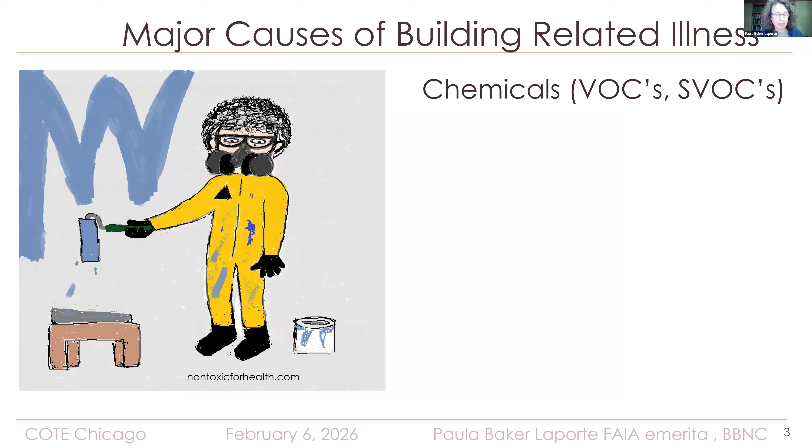Over the years, there's three major things that people called us for. People were affected in three major ways: by chemicals in their environment, VOCs, SVOCs, harder to trace, mold,

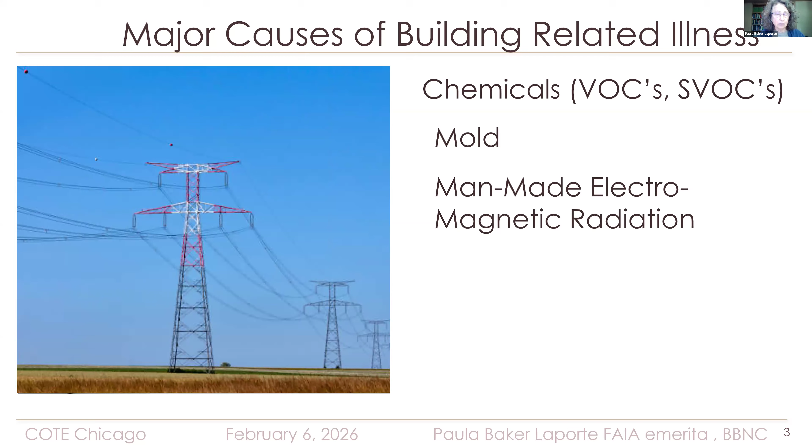and man-made electromagnetic radiation. So what I realize after all these years is that architects should also take the Hippocratic Oath when we become architects, to first do no harm. How do we do that?

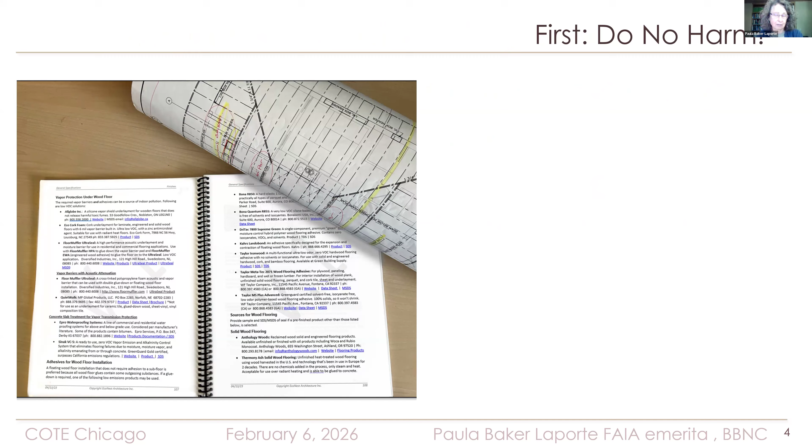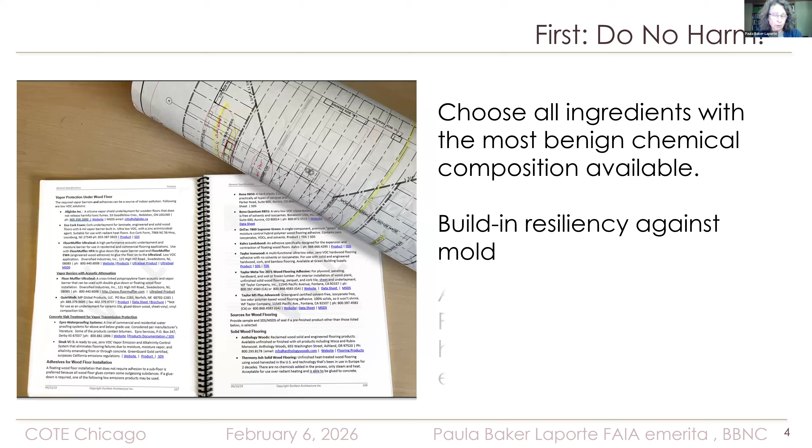Well, we choose all ingredients with the most benign chemical composition available, build in resiliency against mold, and avoid electromagnetic pollution generation in homes and shield from external sources. So I'm going to talk about each of these briefly.

Chemicals. We aren't trained as chemists, and yet to really do the research we need to pick the most benign ingredients, we need to know about chemistry.

What's interesting is that all of the functions and services delivered by living systems found in nature are a result of the use of these 12 chemicals in the periodic table. And these chemicals have a history of serving us for the last 3.5 billion years. That's quite a track record, until about maybe 150 years ago.

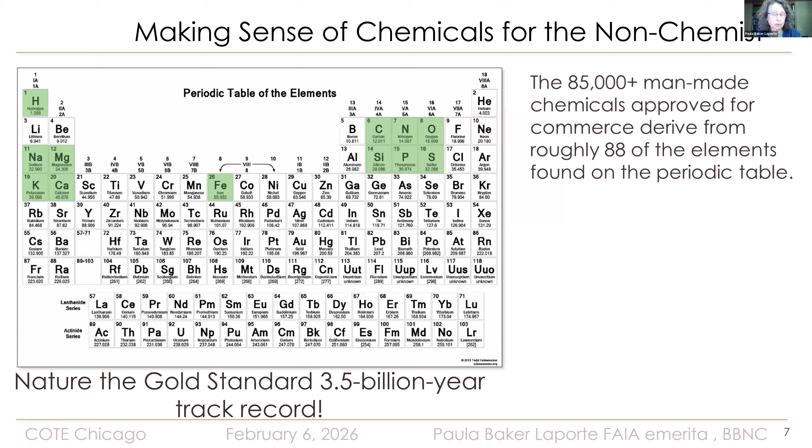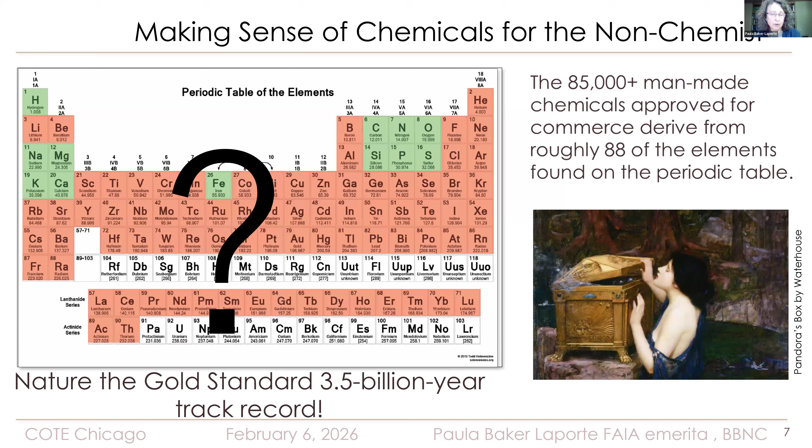Now we have about 85,000 man-made chemicals approved for commerce, derived from roughly 88 of the elements found in the periodic table. And we know very little about them, to be honest. In fact, we've created a veritable Pandora's box.

But don't worry. Well, first of all, you should know that in 1976, the EPA created the Toxic Substance Control Act, and 62,000 of the chemicals were automatically grandfathered into the national database with no testing. But they now have a mandate to test them as of 2016, if things don't change.

And they can test approximately 16 a year, which means that in another 3,875 years, we'll know what we've done.

So we know that you can take two man-made chemicals, combine them, and get something deadly. If you look in many people's cleaning closets, you'll find both Clorox and ammonia. When you mix those two together, you get nerve gas, and it's readily available. We know almost nothing about the thousands of chemicals we've combined into our environment.

So how do we decide what makes it healthy? When I started, nothing advertised being healthy because no one cared. Now everything advertises as being healthy. There's such a thing as greenwash, as you in the Committee on the Environment for Chicago must know.

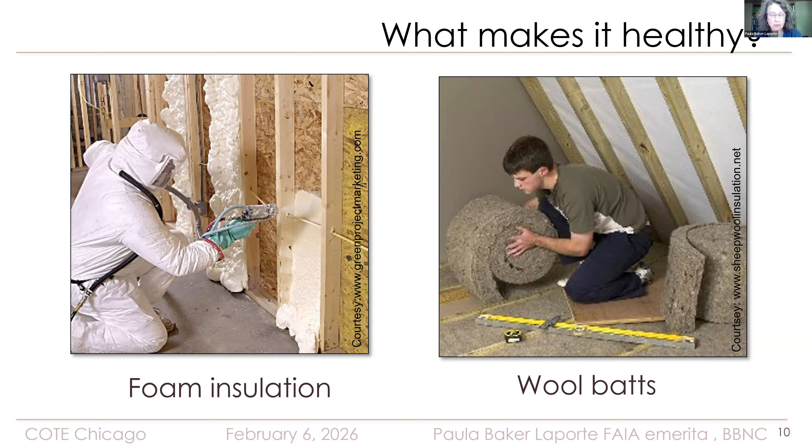So here are two products, both advertised as being good for you, for your health. And so we have to be the discriminators for our clients, who know even less than us.

We have help now. Harmful chemicals are now revealed, declared, disclosed, and scored by a number of organizations. But it's complicated—who's certifying what, for what? There's not consensus among the organizations of what they should be screening for, and it takes time.

Homeowners lack the skill set, and that's why we as architects need to learn them. Consumers are getting more informed, but if homes had better labels, if we taught our clients more, health-minded consumers would demand a better product than what they're getting.

So here's what your clients can do: they can find out what's in it before they buy it. Because we can make all the effort possible to create a clean building, and then when people move in, they can destroy it almost instantly by bringing in products and practices that'll destroy their health.

By simply taking their shoes off, they can help the health of the house incredibly. The highest rates of pesticides in the country are found in carpets in Florida because everyone walks on the pesticides and then walks all over the carpet. And that's where the babies play. And we can build in things that help them detox from a toxic world out there, such as saunas.

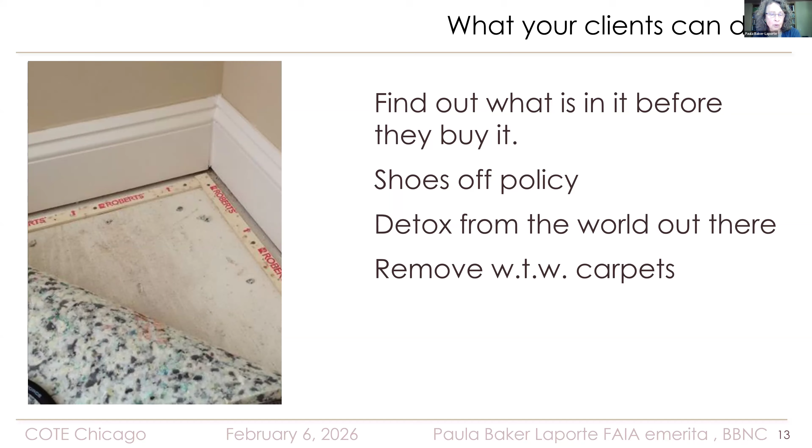And good routine cleaning can go a long way. We can prevent VOCs and SVOCs, forever chemicals that stay in the environment and only get cleaned out. They're harmful to us because they're in the dust, and good cleaning practice is a way to get rid of them, besides reducing them in the construction.

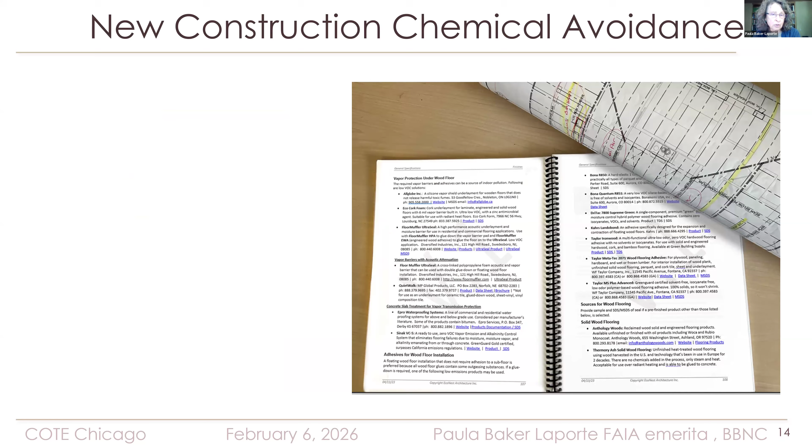We can design for combustion safety, separating cars and combustion sources from future occupants. We can design in climatic resilience to minimize the dependency on mechanical systems and provide mechanical air filtration.

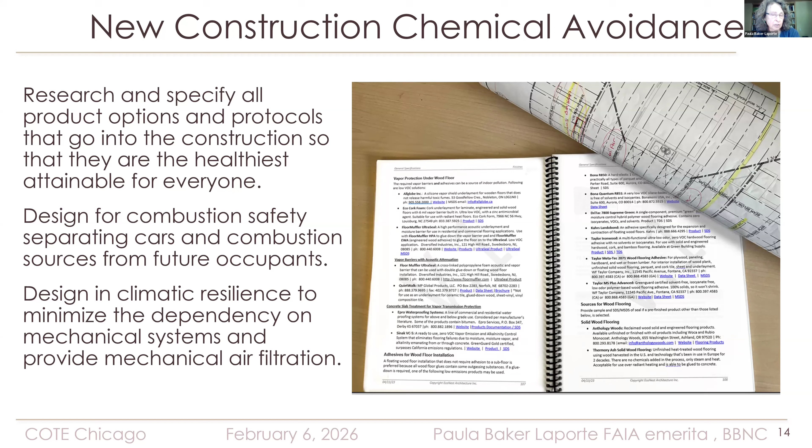So I'm just going to talk about mold for a moment. So why are our homes so mold prone? First of all, 95% of them are stick frame construction. It's very rare to have a stick frame that is not moldy on move-in date because they get rained on. They're hard to shelter and expensive.

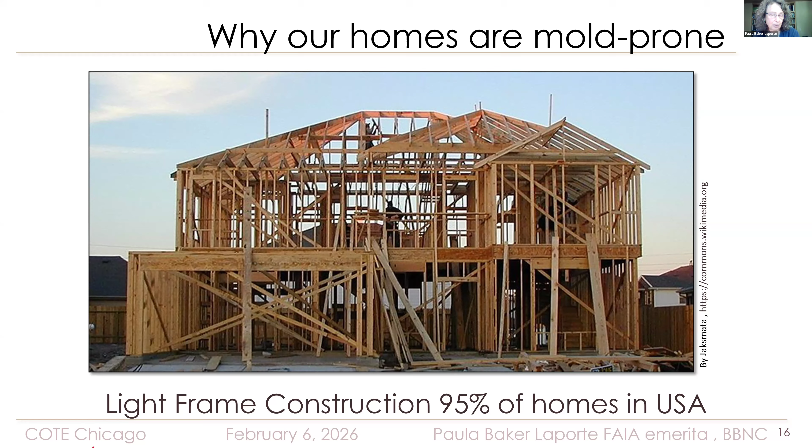Building codes mandate vapor barriers. We have smarter options now, but the majority of buildings are built with plastic on the inside, and the majority of climates have 4 seasons. So that plastic prevents walls from drying out once they do get wet.

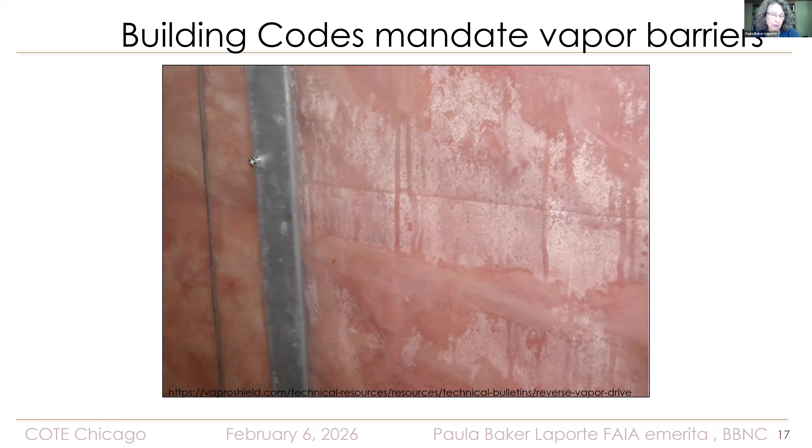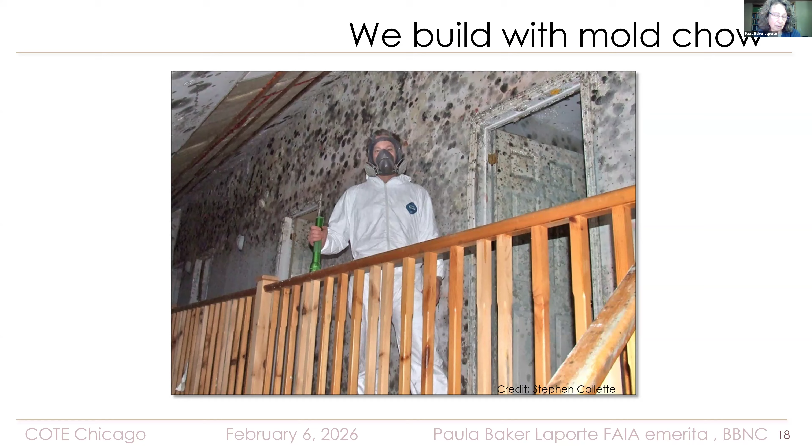We build with mold chow. This was my teaching buddy for 18 years, Steve Collette, who did home inspections. And everything you're looking at there was the result of a water heater breaking while the owners were absent. Within a couple of weeks, the entire building looked like this. It was actually an insurance teardown.

We use standard plastic finishes in our buildings that trap moisture. And when you trap moisture behind plastic, mold happens.

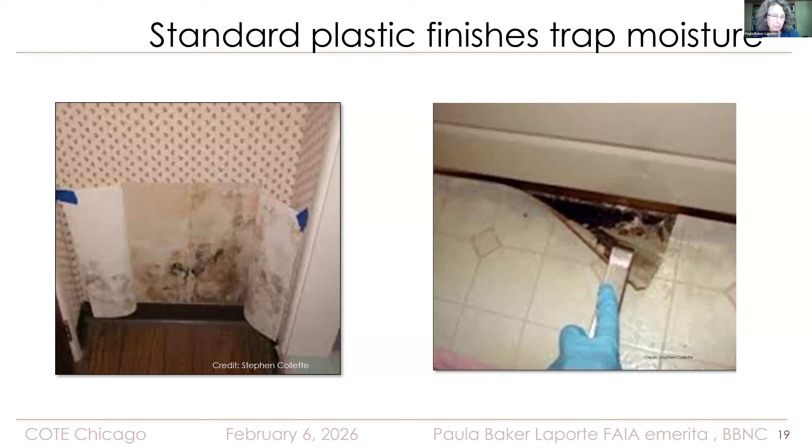A huge percentage of our homes are centrally heated with a furnace and ductwork to distribute it. And once the home becomes moldy in one area, the ductwork does a great job of distributing it throughout the house. Ductwork, if it's not maintained, becomes a trap for dust, which, add moisture, and you've got moldy ductwork. Huge problem.

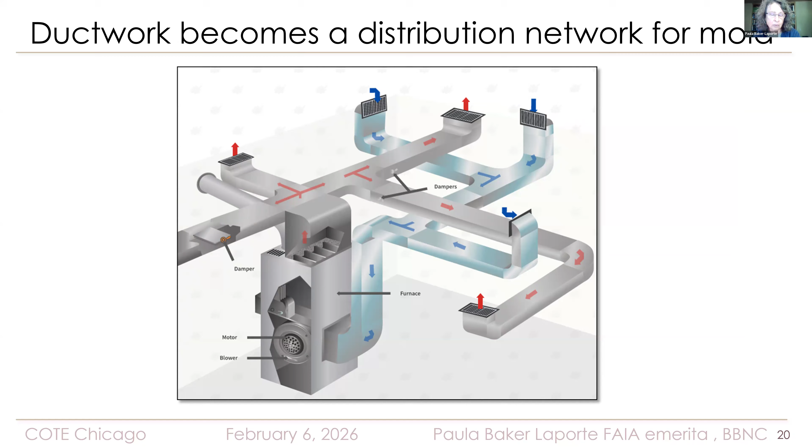Homeowners can do several things to prevent, once we equip them with a good home, water loss events, which is half of why people come to us because they're sick from mold. They had a flood of some type. The water heater broke and they have a crawl space and no one was monitoring the crawl space. And when someone finally went down there, it was covered in mold. We hear these stories. I've heard them hundreds of times now.

Well, one thing a homeowner can do is get water loss detectors and shut-off devices, and we specify them for all of our buildings.

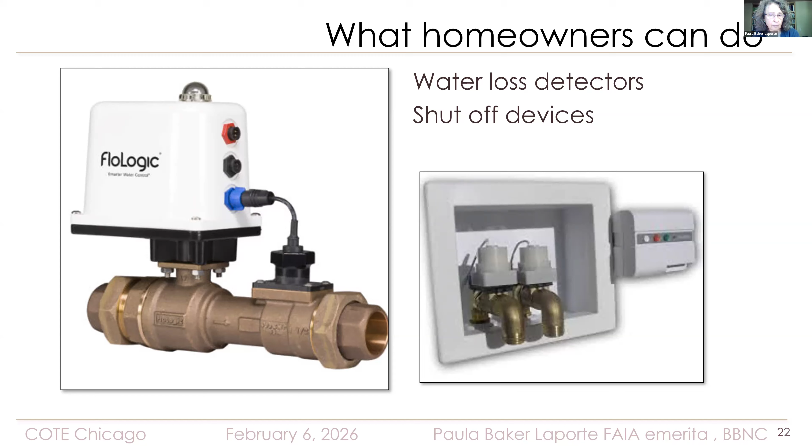Sink liners, for homeowners who don't go around and inspect under their sinks. It's not if the plumbing is going to leak, it's when. And when it does, and if you're not looking, is it going to cause mold, or do you have some protection?

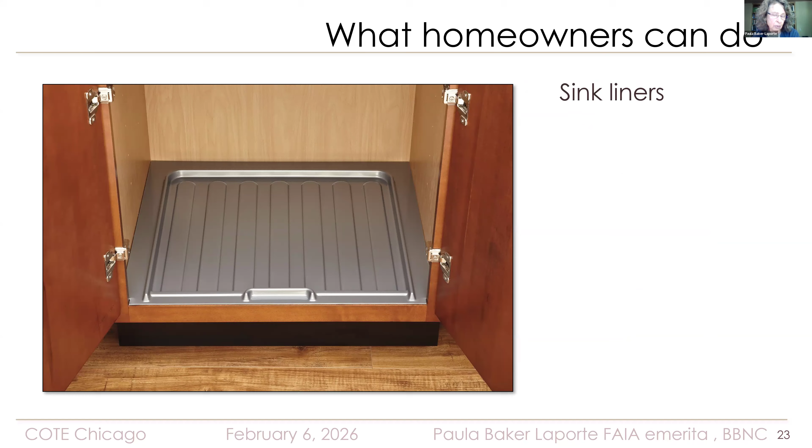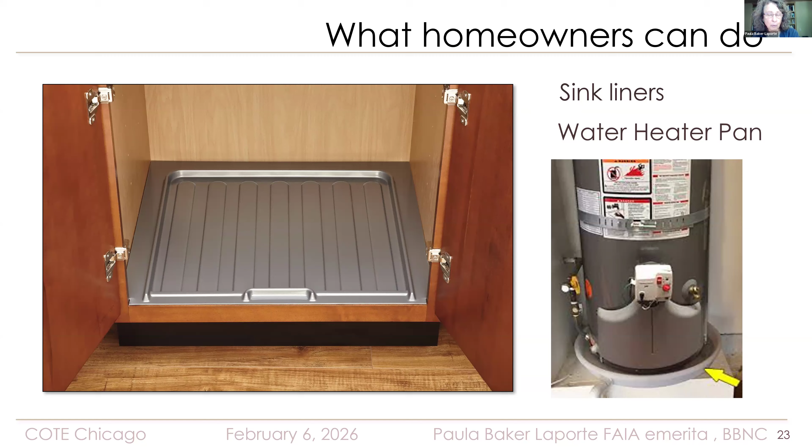Water heater pan. So you can fit a water heater with a pan so that when, not if, but when it does break, it doesn't cause mold.

They also have better appliances now. So you can buy dishwashers, for example, that have built-in flood protection and will shut themselves off as soon as any water is detected in the wrong place.

If a homeowner suspects they're sick from mold, professional testing is the way to go. There are many nuances about how to test for mold and what to look for. If you, as an architect, are educated in the generalities of that, you can save these homeowners thousands and thousands of dollars that can be put towards correcting the problem.

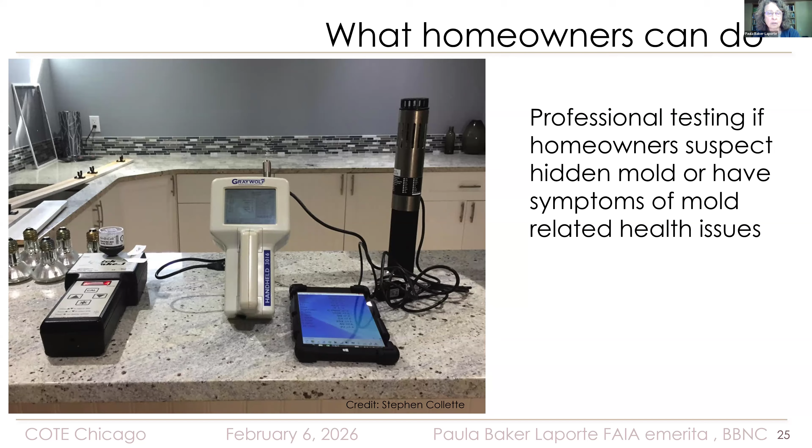So here are some of the things we have done for new construction mold prevention that are in our specifications. We introduced building protocols that protect the building and its components against moisture during construction. Again, difficult to do with stick frame construction, but you can specify that it be dried out and remediated before any insulation or finishes are put in.

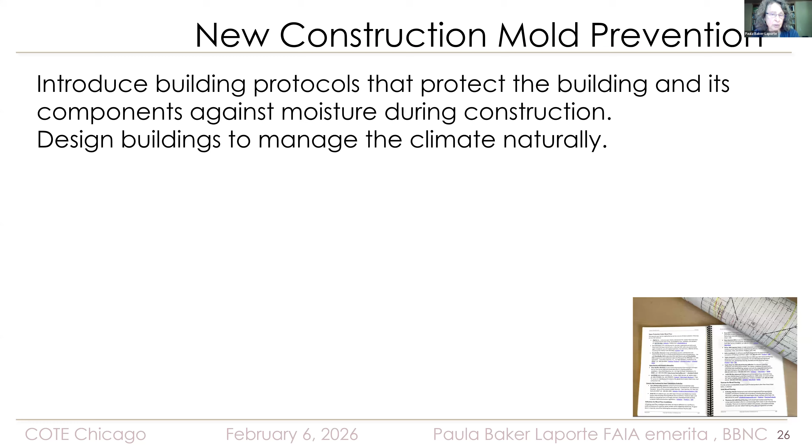Design buildings to manage the climate naturally—we'll talk more about that later. Create a watertight envelope and direct water away from it. Build in resiliency to prevent condensation. Create hygric buffering, airtightness, insulation, etc.—all of the good things that building science has taught us over the years.

Dry out new wet buildings from wet construction processes. This is often overlooked and most often not specified for residential homes, and is the cause of several mold events. Avoid building products that are a ready source of mold food.

We have not built a stick frame home or designed a stick frame home in my own practice for the last 30 years I was in it, but we do consulting on a lot of stick frame buildings. We will specify, for example, paperless drywall, especially in areas like bathrooms that are prone to mold. Build in safeguards within the building to minimize damage from inevitable eventual water loss events like the ones I showed in the previous slides.

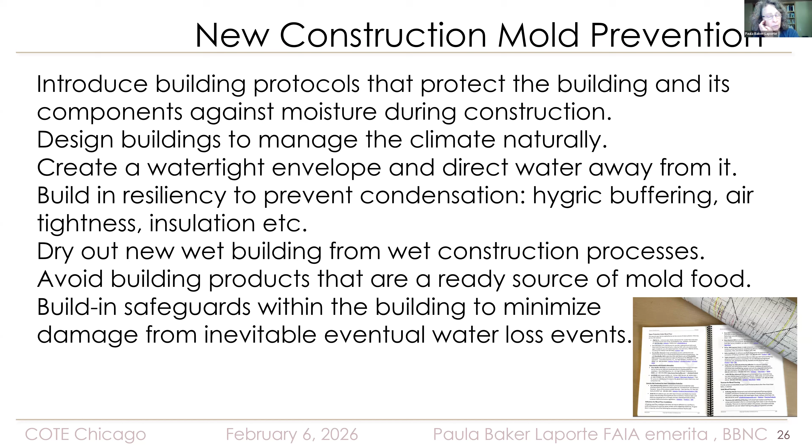So, electromagnetic radiation. You won't find any information on electromagnetic radiation or its harmful health effects in any of the green building scorecards that we've created within the industry. It is perhaps the fastest growing unregulated health threat. We get the phone calls.

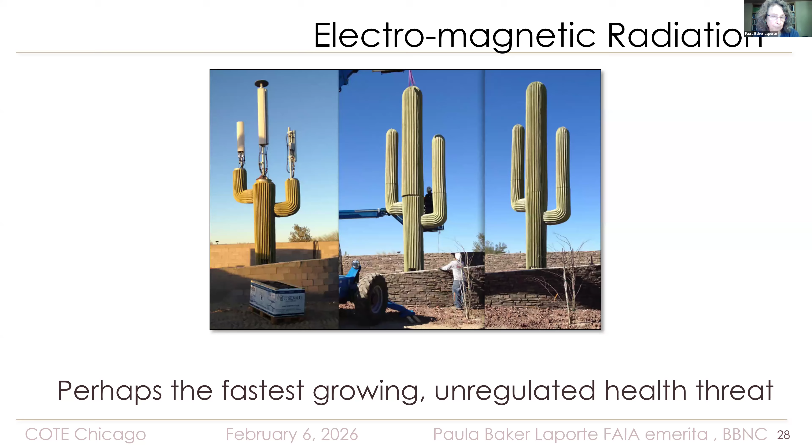In my office, we would get 10 new calls a week from people who were suffering. At first, it was just chemicals. As that has gotten better, mold and electromagnetic radiation have taken the forefront. And it is an elephant in the room.

Is there really an issue? Because I'm a building biologist, I attend all the conferences. It's not my thing—I know who to call, and I know the basics, and our specifications in my book have the basics, so architects know what to specify to safeguard their clients' health. It doesn't go into what people need to do if they get someone who's really suffering and is already sensitized—that's much more complex.

But is it really an issue? You would think it isn't. I don't know how many of you have heard of it—it would be interesting to know after the lecture. It could be seen, though.

Martin Pall gave us a lecture at one of our conferences. He's a professor emeritus of biochemistry and Basic Medical Sciences for Washington State University and spent a good deal of his life running tests and experiments on this problem. His conclusion: it can be seen that low-level EMF exposure attacks each of the four things we often value most as individuals and as a species—our health, our brain function, the integrity of our genomes, and our ability to produce healthy offspring.

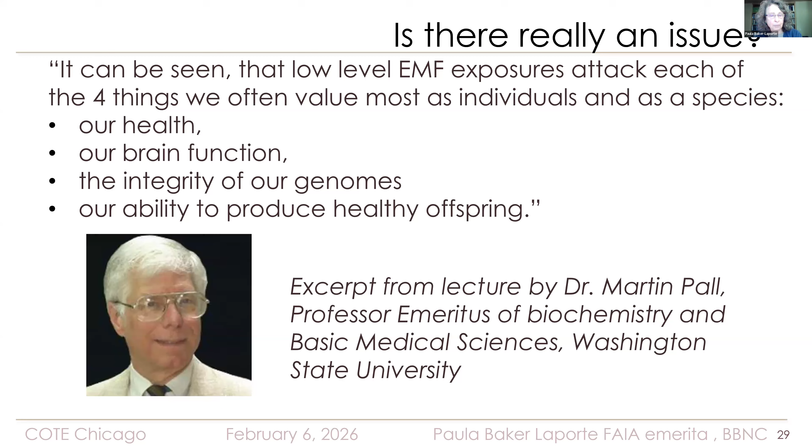Pretty sobering. So what can homeowners do? They can commit to a hardwired lifestyle at home, providing Ethernet outlets and Ethernet connections. It's a lot more stable, and then we have a way to feed our technology without being Wi-Fi dependent.

If someone can do nothing else, they can at least sleep in an electromagnetic radiation-free zone. Our hours at night when we're sleeping are when we do our cellular repair. So this is simple: we can turn off the electricity to the bedroom and measure it to make sure it's safe, and have an electromagnetic radiation survey done on the home.

Homes have different kinds of problems. The Building Biology Institute has done a very, very good job at training electromagnetic radiation specialists since its introduction into this country in the late 80s, when absolutely no one was talking about this and we didn't even have internet yet.

So if you are an architect specifying new construction, the first thing you can do is have a specialist survey the site prior to construction to determine shielding requirements. This is simple instrumentation and something any architect can learn to do as well. Specify building-integrated shielding if it's needed.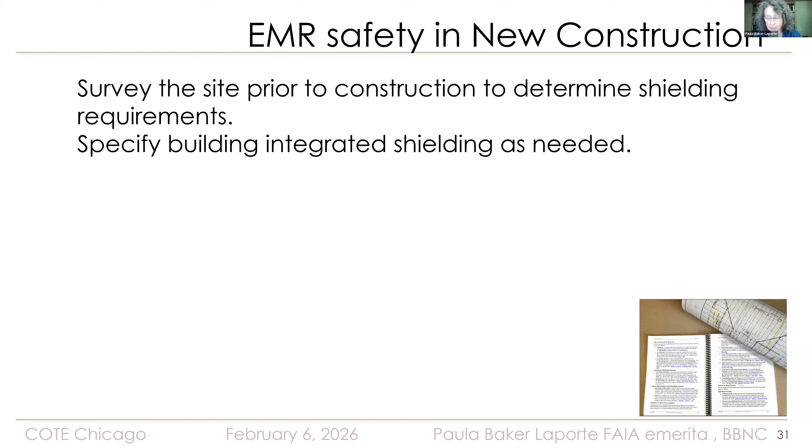We can minimize electropollution from the utilities and the panel. We can specify household wiring to eliminate electromagnetic exposure to the occupant. We can specify the lowest EMR appliances and lighting, which is becoming more and more of a problem as appliances introduce smart technologies—so it'll know when you're out of bread or whatever it's doing.

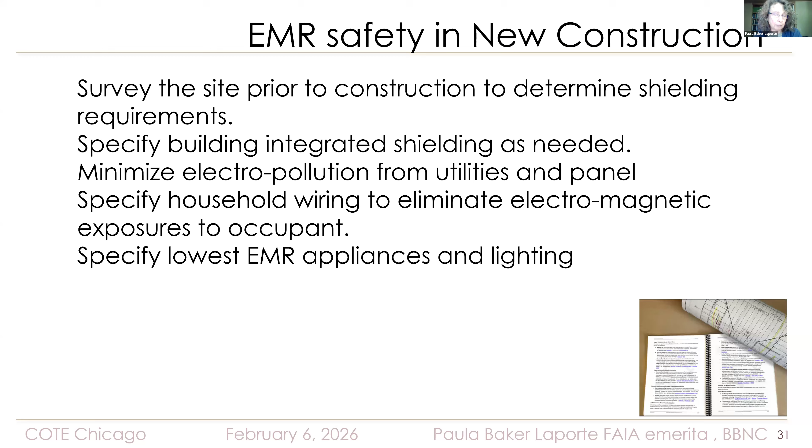And as we ban the incandescent light bulb, the only thing that was guaranteed not to emit certain frequencies, it's a whole new case-by-case rediscovery.

Verify results with an EMRS with calibrated metering devices. So you can specify it all, but if a client really needs it, you need to get the home inspected after it's constructed and at various stages during construction before things are covered up.

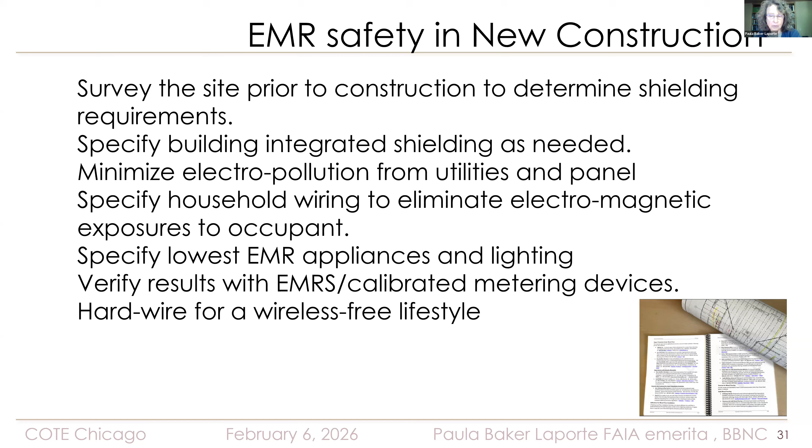And hardwire for a wireless-free lifestyle. At the very least, we can have bedrooms that turn off and put Ethernet in our buildings. So that's how to not cause harm.

Now we get into building biology. What if we could build homes that went beyond not harming us? What if our homes could be a regenerative force where we, the occupants, and the larger community—

—are deeply nurtured at every stage of its building's life, from the acquisition of building materials through construction and habitation and beyond its service lifetime. So what if through the whole life cycle of everything we care about, we could do better? We could build buildings that nurtured.

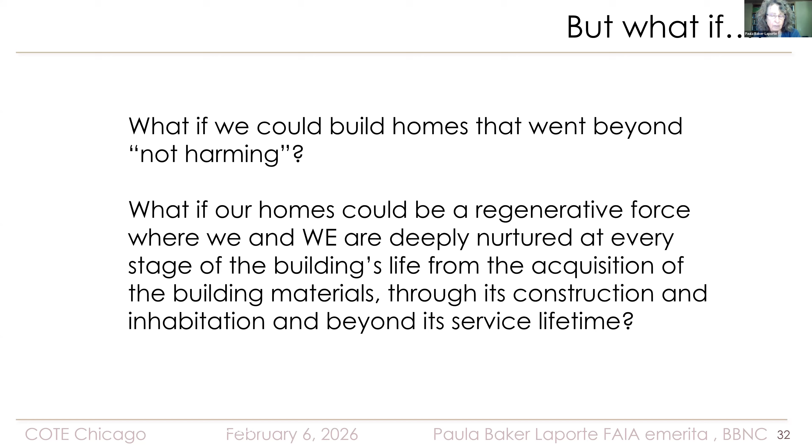I love this think tank. They're in Santa Fe, New Mexico, and I quote this quote from Regenesis in every talk I've ever given.

Green or eco-efficient design is insufficient because it misses the real potential that arises out of the human presence on the planet—the possibility of organizing human activities so that they continually feed and are fed by the living systems within which they occur. It's not enough to aspire to mitigate the effects of human activity. People need to take their place again as part of nature.

This is completely in alignment with the ethos of building biology. So from not harmful to health enhancing, building biology sees nature as the gold standard for human health and model for ecological balance.

The physics of how homes work, how buildings work, is very complex. But according to Anton Schneider, one of the founders of building biology in Germany, the solution is simple: a home will serve your health to the degree that natural, unprocessed materials are used to create it.

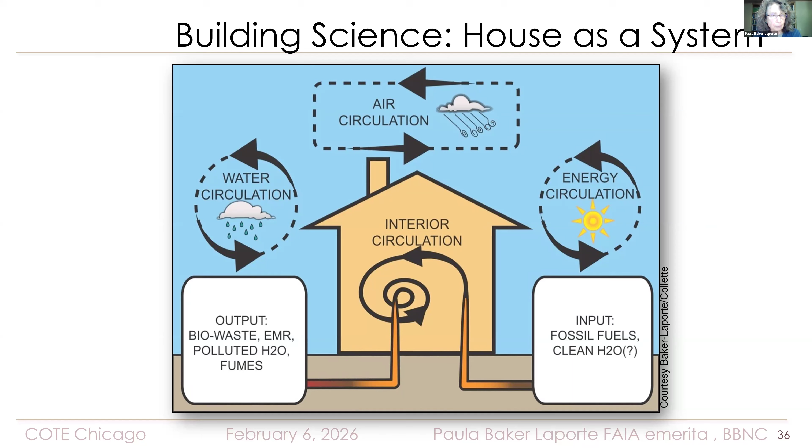If you take that same diagram, green building I would say is trying to achieve house as a better system, still based on house as a system for the most part. The idea is to reduce the input of fossil fuels and water and the pollution from our output to some magical point where we will then be living sustainably, and our buildings will not be causing harm at a rate greater than the natural environment can handle.

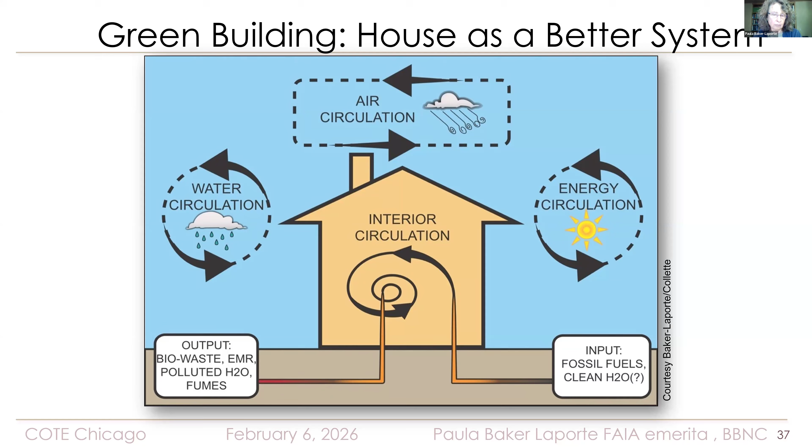Building biology has a different paradigm. It sees the house as an organism and asks: how can we mitigate or ameliorate the vicissitudes of nature and still bring those health qualities into it, and be good citizens in what we output as well.

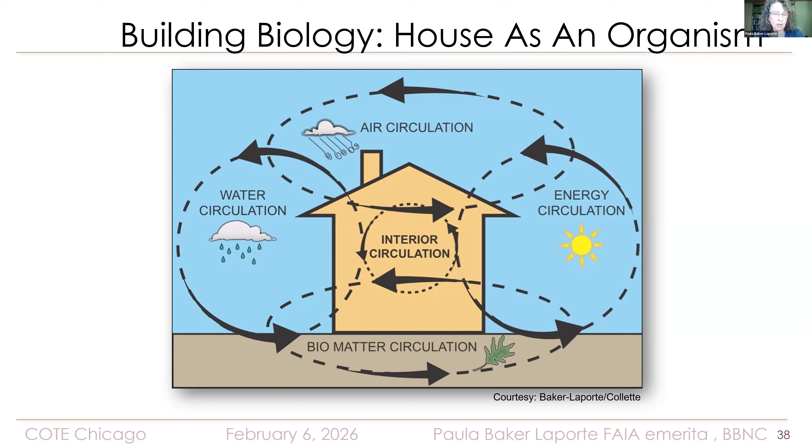So be a part of that system. How can our homes help us to be part of the natural system? In the European context, this is not as big a news in Europe as it is to us North Americans, because they're surrounded by buildings.

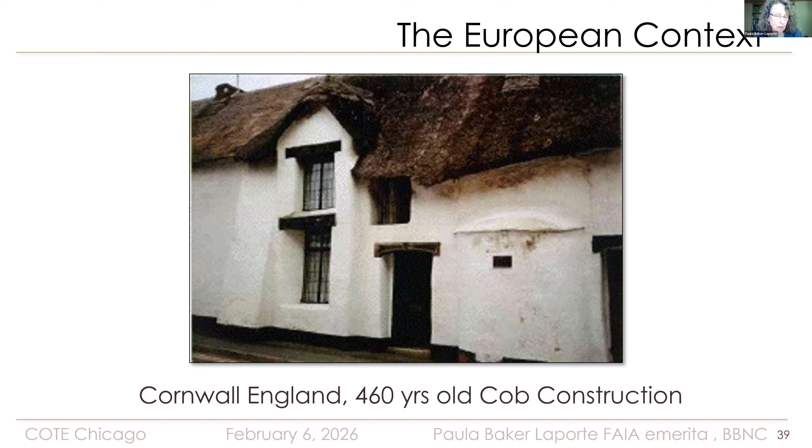Cornwall, England, this cob building, 460 years old. Rhone Valley, France, rammed earth, 250 years old. Limburg an der Lahn, 650-year-old wattle and daub timber frames that are loved.

Maintained, and still in action. Compare that to our homes, which are in need of serious renovation by the time their 30-year mortgage is running out. It's a different mindset about how to build.

So what do all those buildings have in common? Clay. Clay has an unparalleled hygric buffering capacity.

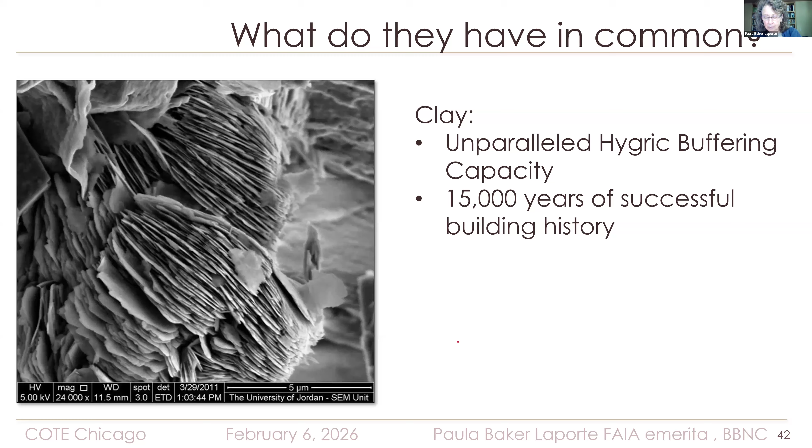I remember being at a conference a long time ago. I was a speaker about natural building, and Joe Lstiburek was the spokesperson, rightfully so, of building science, and he talked about hygric buffering capacity for the first time. Through his talk I now understood what the Germans were talking about in their literature - an unparalleled amount of hygric buffering capacity, so much that these old buildings had flow-through wall systems. They didn't require any kind of barrier because they could handle everything in terms of water that the atmosphere was throwing at it. Clay has a 15,000-year history of successful building use and craftsmanship.

So building biology, along lines with seeing our home as nature's the gold standard, sees our home as our third skin, a dynamic interface. Our second skin is our clothing.

Our first skin is our skin. It's the largest organ in our body. Our skin shape shifts as the external environment changes, insulating us from cold and cooling us from heat.

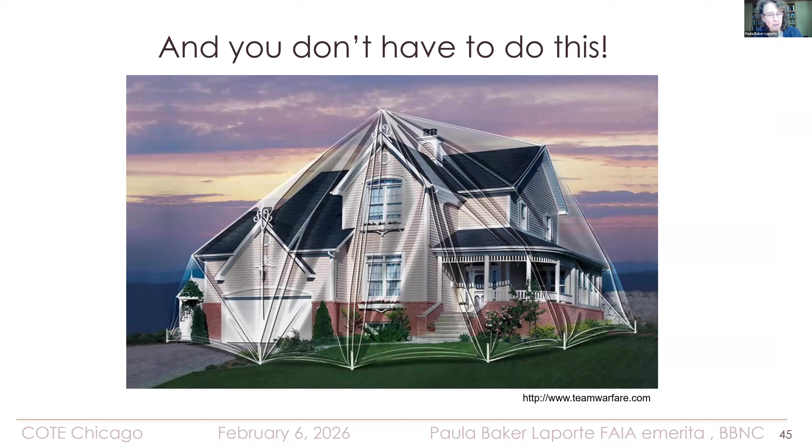So there are 25 principles of building biology. And if we distill them down to the type of building we would want to create, we want natural mass wall construction that's vapor open, high hygric buffering capacity, energy efficient, low embodied energy.

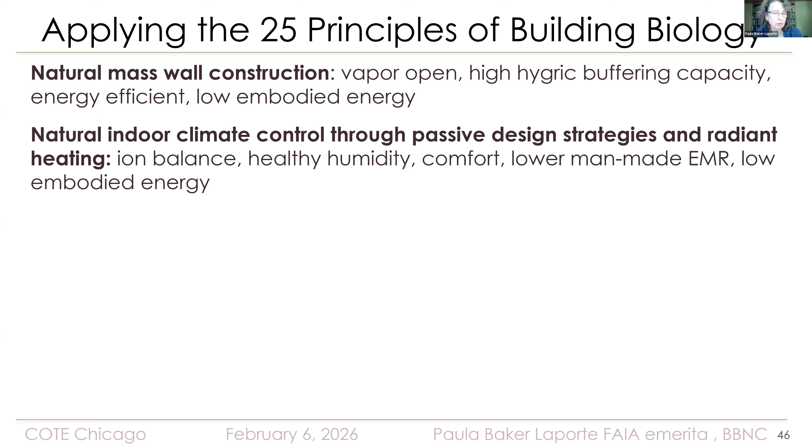We want natural indoor climate control through passive design strategies and radiant heating. We want this because when you combine radiant heating and thermal mass as the main heat source, you create ion balance, healthy humidity levels, comfort, lower man-made electromagnetic radiation, and low embodied energy.

We want natural daylighting and air exchange. We want the daylighting to be diffuse, multi-directional, operable, shadable, and site-specific. We're not against technology, but what about when the power goes down?

Natural, non-toxic materials, finishes, and furnishings. They should have a pleasant smell, be hygroscopic in and of themselves. They should create a balanced, subtle electroclimate - that is the DC climate, direct current - be sorptive, have sorptive acoustics, and color and pattern per nature.

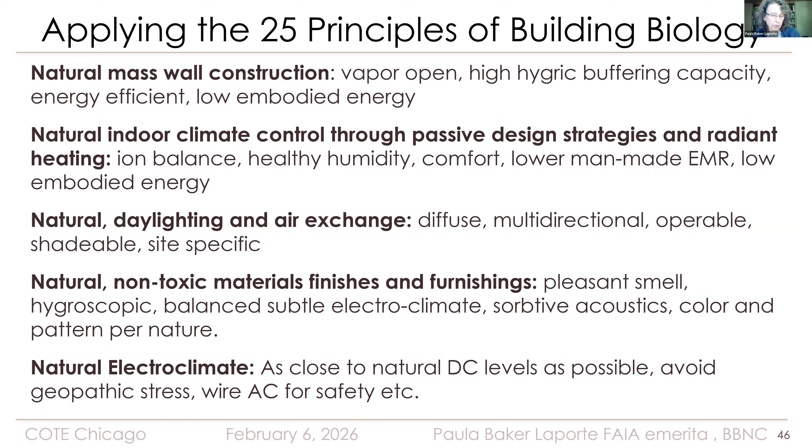And we should have a natural electroclimate that's as close to the natural direct current levels as possible, avoiding geopathic stress, and wired for AC safety, as I've mentioned.

So mass wall construction - what's available now here in North America that has mass and insulation, is non-toxic, has exceptional hygric buffering capacity, vapor open, EMR blocking capability.

Zafira, I realize I don't have any clock to look at while I'm doing this. If you can tell me when I've got like 5 minutes left, I will talk fast.

Okay, these are all methods I've either had the opportunity of working with, or there's a couple that I've drawn but didn't materialize. But they're all available depending on where you are in the country.

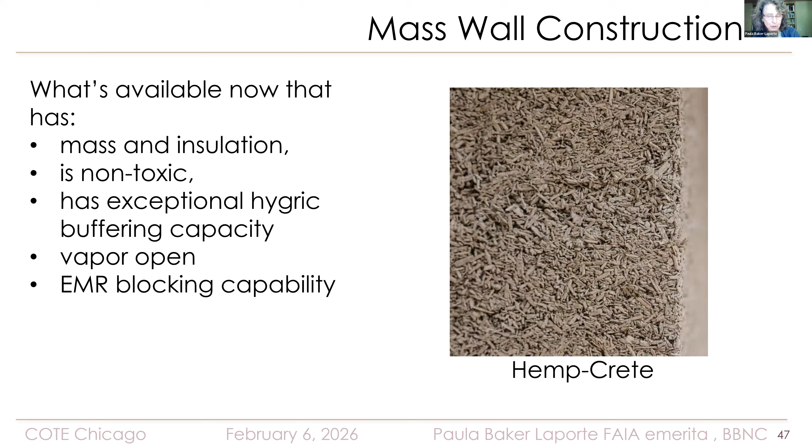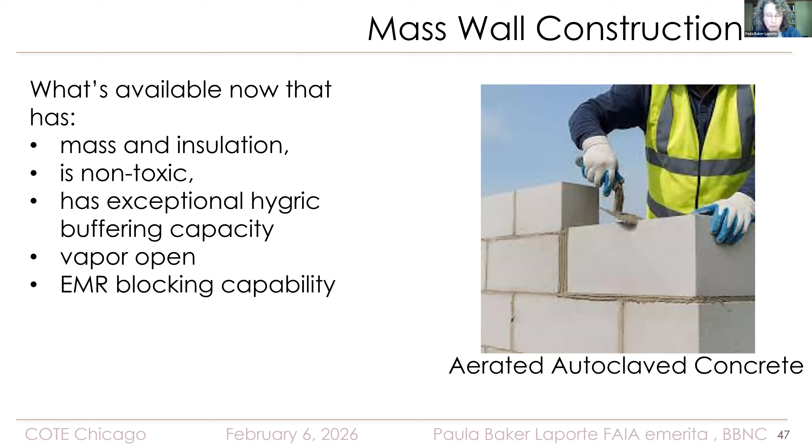Adobe, compressed earth block, available even in Chicago. Rammed earth, light straw clay, which is what I spent a great deal of my career working on. Hempcrete, which I think is a marvelous kind of newer version. Wood insulated concrete forms available and usable, made in Ontario, Canada, made in Oregon. And AAC, aerated autoclaved concrete, very popular in Europe, Japan, India, everywhere else I've traveled, and available in a few places here.

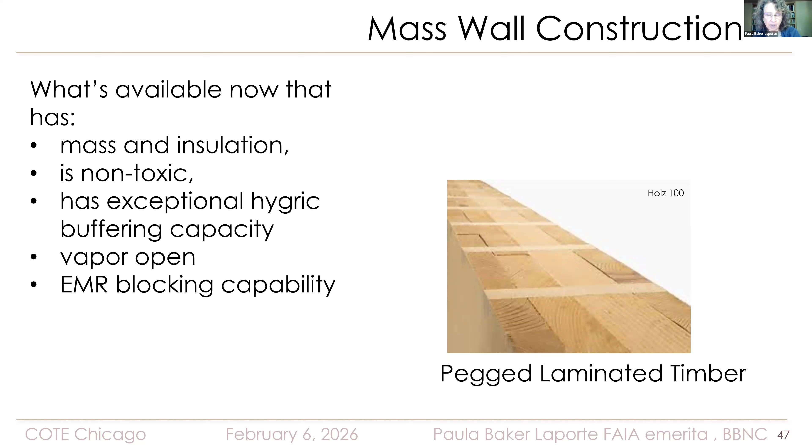All of these have the qualities. And then pegged laminated timber, wonderful material, again available through Holz 100 in Ontario, Canada. And it has all of these qualities.

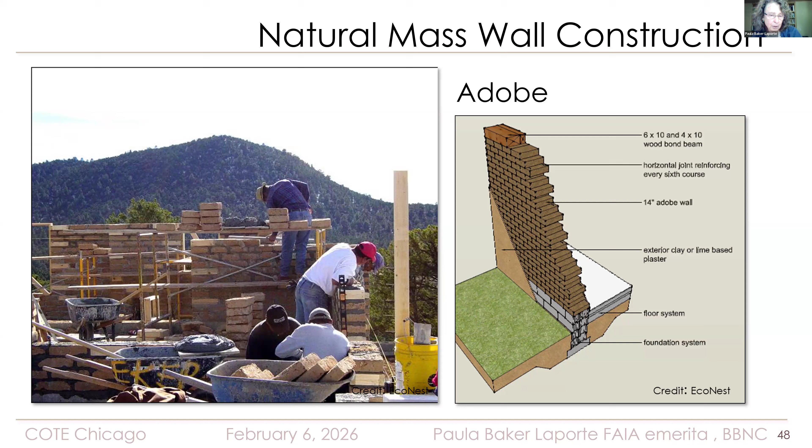So just some of the work my firm has done - natural mass wall adobe in Santa Fe, where I cut my teeth as an architect. These were not considered mud huts by any means. If a home was real adobe, people understood the quality and the feel of it, and it demanded more on the real estate market. So brick by 40-pound brick, the homes went up.

And here's some of the finished homes that we were responsible for designing. So you can see these aren't mud huts. These are high-end homes with a high degree of craftsmanship. Light straw clay.

In the time my husband and I worked together, Lou worked with Robert before I lassoed him and came to Santa Fe, but we have worked in 17 states, 5 provinces, and done over 60 homes. It's probably over 100 homes built with the light straw clay method. I worked with a team of people, including Lou, to get it into the International Residential Code. Robert and I had the privilege of writing 2 books about the work we've done with light straw clay. This was the first home we built for ourselves in Santa Fe in 1999, and this is the home we currently live in Ashland. We didn't change a whole lot in the formula, just small refinements over the years. We've built for ourselves about 5 times. We've lived in this home for 14 years now, the longest either of us have lived in a single place.

So, natural indoor climate control. How does nature do climate? Think of the sun and the earth. It's radiant heat, stored in thermal mass. If we were to spray the surface of the earth with foam insulation, humanity would not survive.

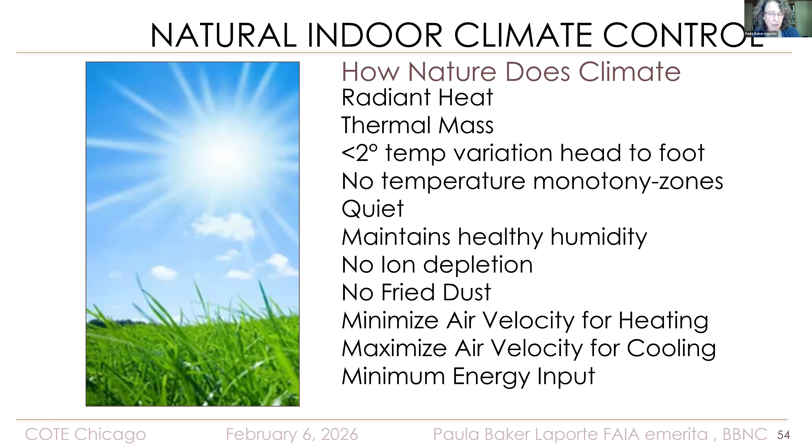So you'd have a 2-degree temperature variation from head to foot, like nature. There's no temperature monotony zones. We're talking about nature at its best, not nature in the Sahara Desert or places we probably wouldn't want to live. It's quiet, maintains healthy humidity—in other words, it doesn't blow air around to dry it in good climates. There's no ion depletion in good places in nature, no fried dust, and minimal air velocity when used for heating. We maximize air velocity for cooling, with minimum energy input—no fossil fuels burned to make the planet able to sustain us.

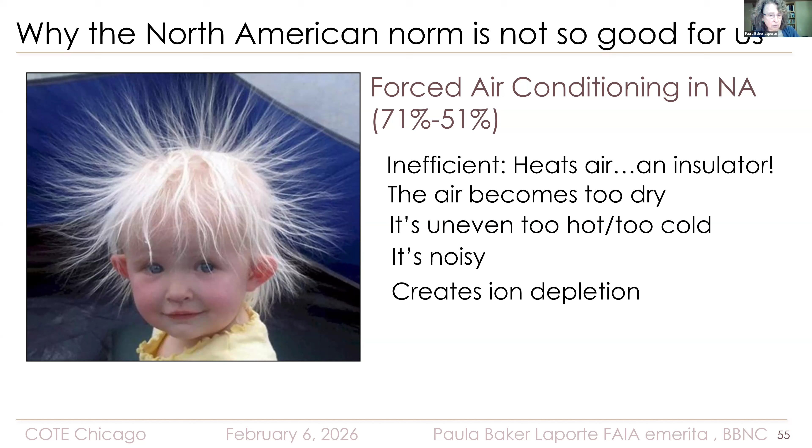Forced air conditioning in North America, through traditional furnaces—though mini splits and air-to-air systems are becoming popular—still contributes to 71 to 51% of our homes in North America. How does it compare to nature? Well, it's inefficient. It heats air through convection, and air is an insulator, so this is not efficient. The air becomes too dry. It's uneven, too hot, too cold. It's noisy. It creates ion depletion—negative ions cling to ductwork, so our air becomes like a Santa Ana condition in ion count. Furnaces fry dust, which especially nowadays with all the SVOCs is a serious toxin. Ductwork often distributes dust and mold.

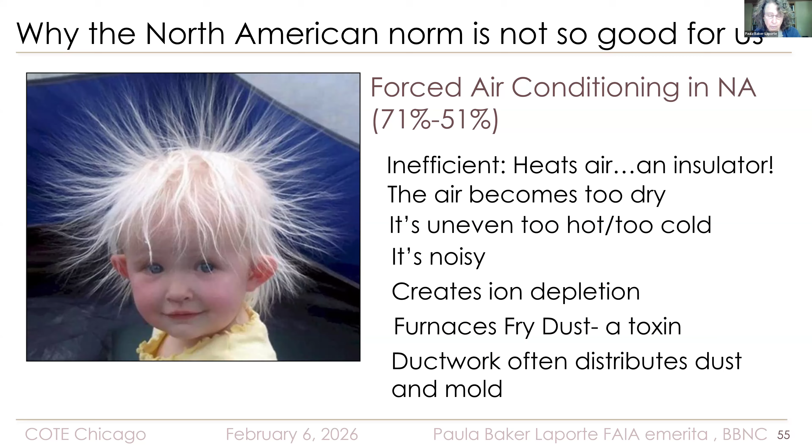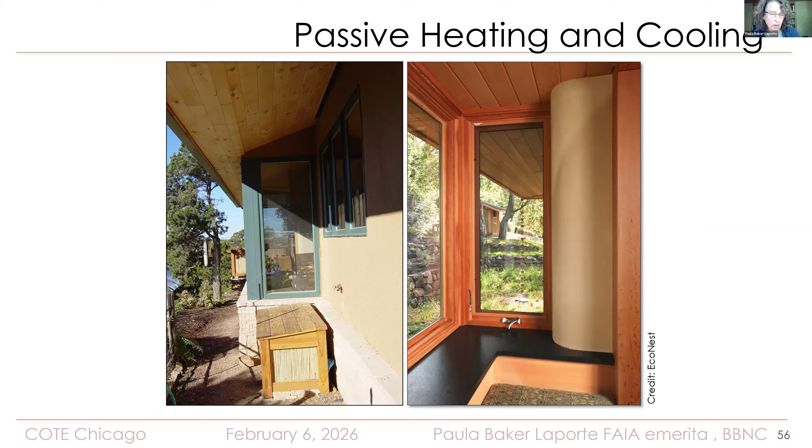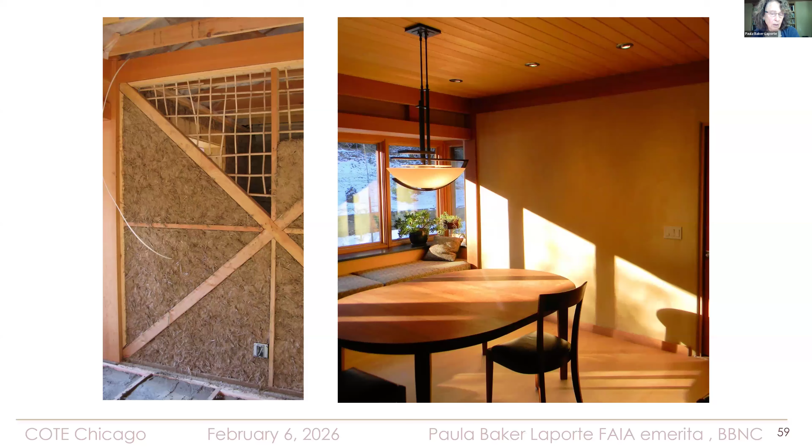So the best solution is to get as much as we can from passive heating and cooling. Here you see, on an Econest, a sun bump on the outside and on the inside. We have deep shading around our buildings to protect the natural wall system, large roof overhangs, and then we pop out with pretty invulnerable materials where we want to collect sun on the south—passive winter heat gain. We build in thermal storage capacity. It's really easy in Santa Fe, with great diurnal swings and sunny winters and access to thermal materials, but these work in every climate if used properly. This is our shear wall, which we had to build because we're in earthquake country. On the left, you see crossed beams per our engineer's instructions, then filled in with wattle and daub construction, so that when the sun shines on this side, it warms the bedroom on the other side.

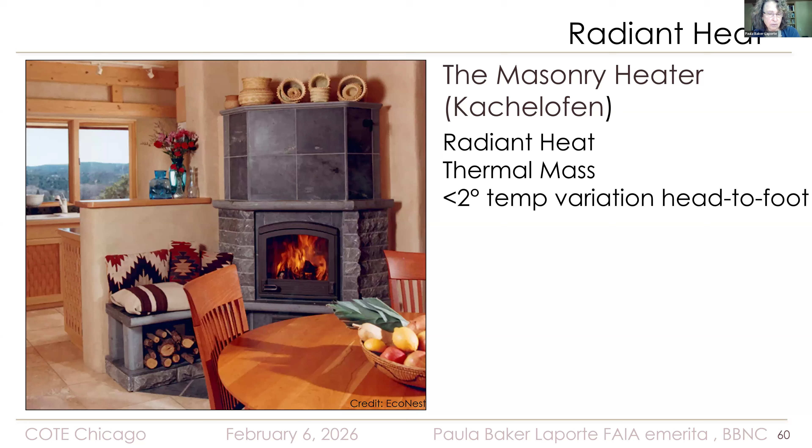The masonry heater—radiant heat. Building biology talks about the Kachelofen as the original material. I didn't know what it was, but I knew I wanted one, and here's how it works. That's a finished model; it weighs several thousand pounds, and the wall around it, in this case, is adobe for added thermal mass. What it creates are the ideal conditions for building biology: less than a 2-degree temperature variation from head to foot at its source. There's no temperature monotony—if you're too hot, you move further away. It's quiet, maintains healthy humidity, meaning it doesn't dry the air out. There's no ion depletion because there's nothing for the ions to cling to. In fact, soapstone will emit negative ions into the air. There's no fried dust, since it doesn't get hot, and no blowing air because it's a radiant source.

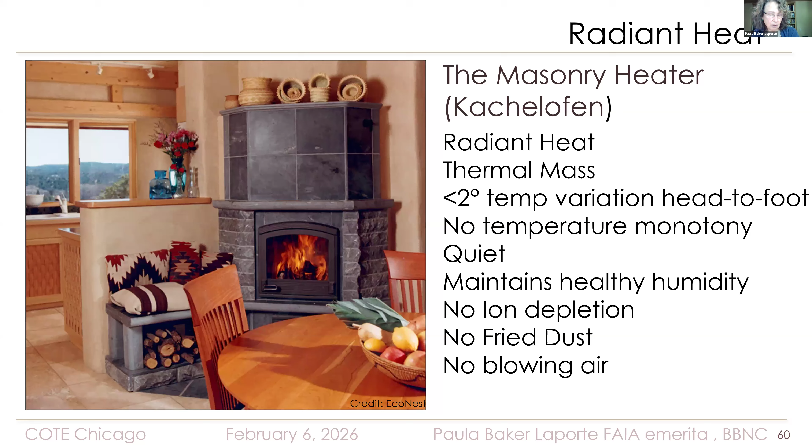I was really disappointed that we couldn't get a LEED rating for this house because we couldn't get the basic Energy Star rating, because we didn't have an efficient air conditioner, because we didn't need air conditioning.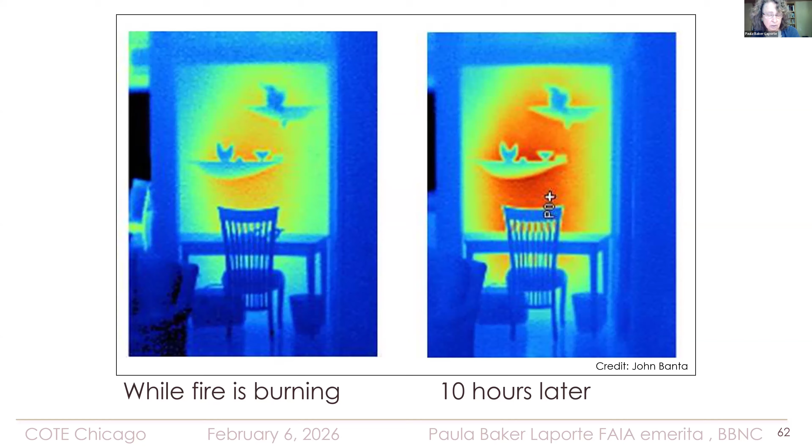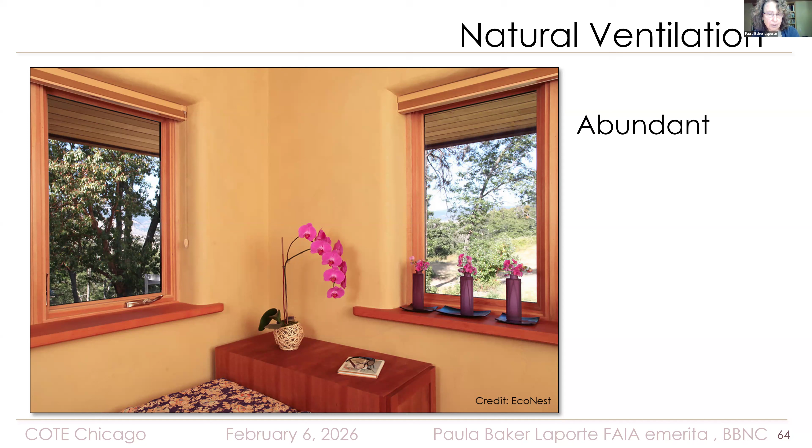So even if we have an HRV, we have one, I don't know its worth in our house because we have cross ventilation provided in all of the rooms. It's a design feature: make it abundant, operable, shadable, site dependent.

Natural and non-toxic finishes. Here you see an adobe home we did in a very hot part of Santa Fe.

Hygroscopic regulation of healthy humidity. If you have clay on your walls, what we do now is we make our bathrooms really wet and we suck all the air out so that we won't get mold. Then the rest of the house is getting dried by furnace heat. And so it's unhealthy conditions.

We want balanced, abundant ionization, serene acoustics. If the walls are sorptive materials like clay, they will absorb sound and there's no echo.

Pleasant, neutral smell. Color and pattern in accordance with nature. Balanced DC electroclimate and earth coupled. In this case, it's an earth floor.

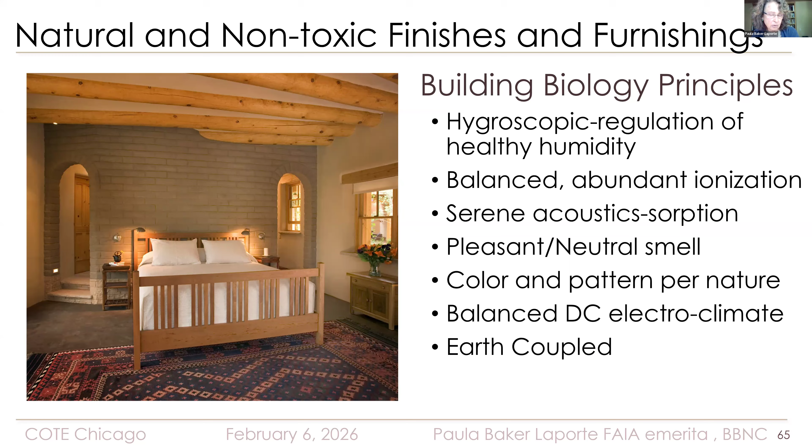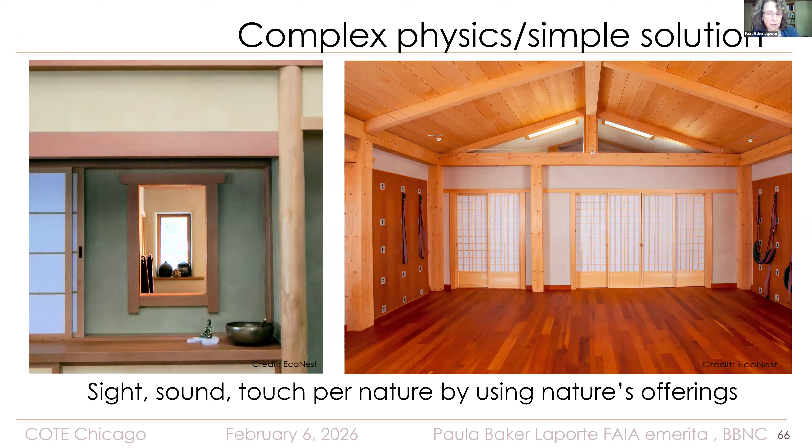So the complex, it has building for health. The physics is complex, but using natural materials is a simple solution. So sight, sound, touch per nature by using nature's offerings. Our 5 senses, common sense.

So I always make the parallel of food and housing, food and shelter, because the statement that there's almost always a direct correlation between the biological compatibility and ecological performance holds true for both.

I never understood this until I had a client with parrots, and she built a house around her parrots. Long story, but parrots cannot be around machine-made goods, or they suffer from mental illness and die. So what does that mean? They need a natural environment, and maybe the parrots are our canary in the mine shaft.

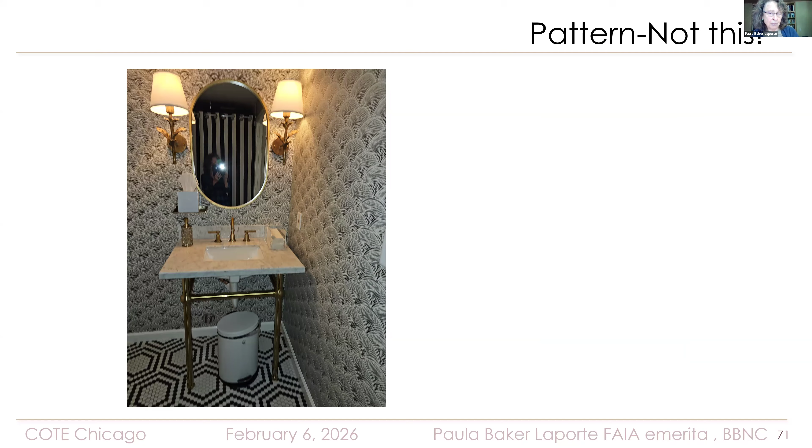Lots of stories. One more minute.

As with sight, so with sound, humans evolved in nature, where every sound was the conveyor of information essential to survival.

As with the sights of nature, there's a pattern, tone, and inflection without repetition. Rhythmic, we all know what a brook sounds like, but it's not repetitive. It's like the visuals of a snowflake, never repeats. It's soothing to us physiologically and psychologically.

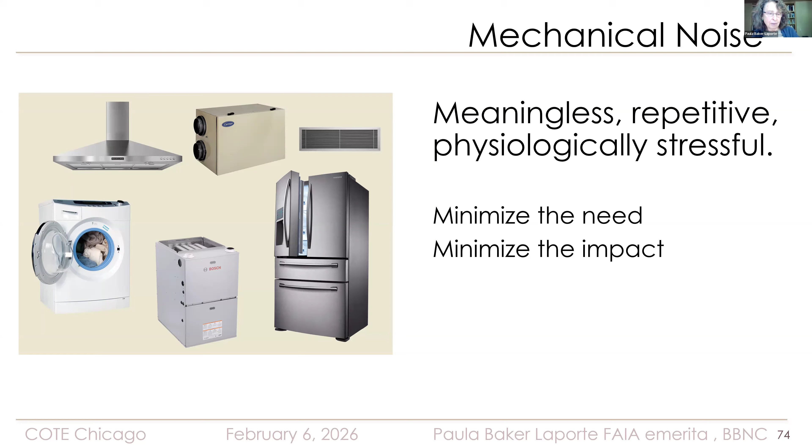But what do we do in our homes? We introduce meaningless, repetitive, physiologically stressful sound in all of our mechanics meant to make our lives better. We need to minimize the need for a furnace to turn on frequently, minimize the impact of the sound by using sorptive materials, etc. As with sound, so with touch.

It feels like the stuff we like to go barefoot on in nature. So just a quick comparison - the house is a system. Conventional green building is technology based. Building biology sees a house as an organ or an organism - it's nature based. We defined as an industry what's green.

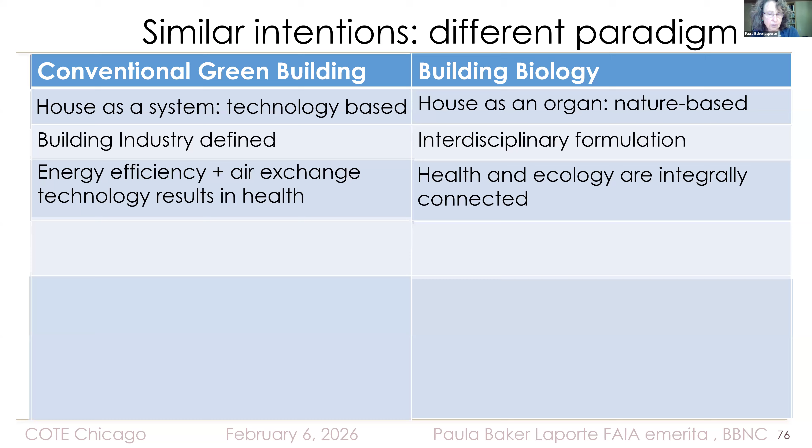Building biology was formulated in an interdisciplinary atmosphere with doctors, psychologists. I have heard many lectures that claim that energy efficiency, in other words air tightness and introducing mechanical air exchange, will result in health. That has not been my findings. Health and ecology are integrally connected through nature.

A lot of green buildings stress state-of-the-art technology as life support, whereas building biology stresses climate-based resilience, minimizing the dependence on technology.

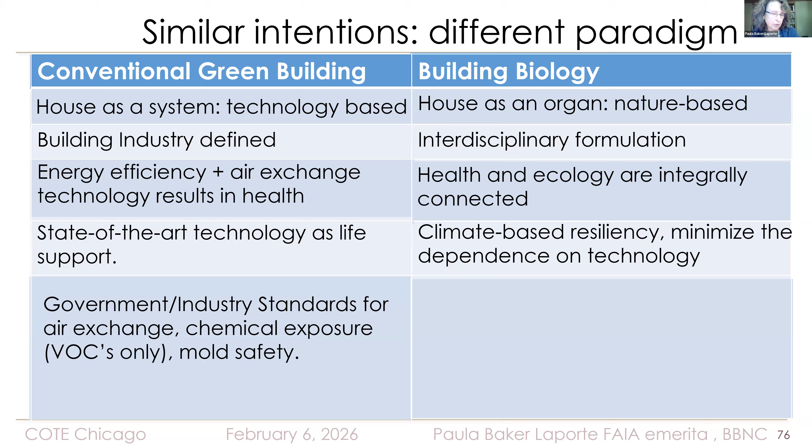Green building and green building scorecards use government industry standards for air exchange, chemical exposure, VOCs only - no attention to the SVOCs, and for mold safety. Building biology has introduced a precautionary principle for VOC and SVOC exposure, electromagnetic safety, mold prevention, ion balance, subtle DC electroclimate, indoor climate standards, which are much stricter than the ones we have in any of our point systems here. Longevity with biodegradability at the end of life cycle, a history of successful use, and we'll go on.

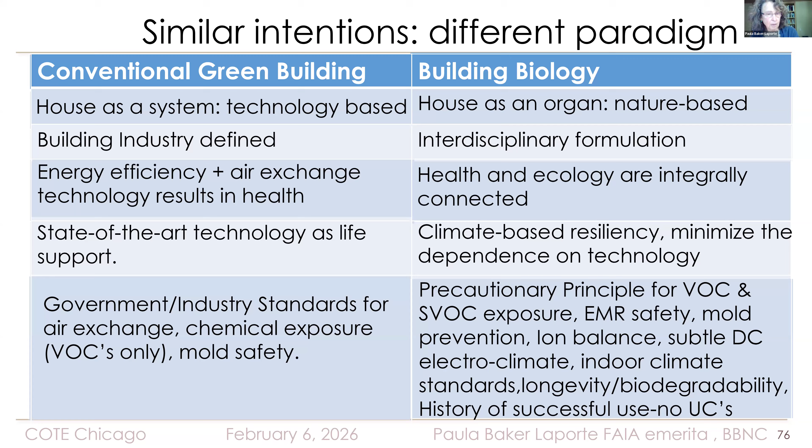So in a world of compromise when it comes to our homes, we don't have to leave nature behind when we walk through the front door.